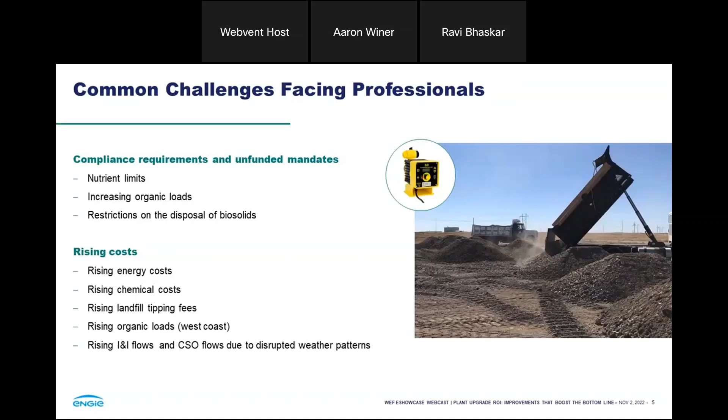We talked about rising landfill tipping fees, rising organic loads, and of course, in many areas, disrupted weather patterns and increased storm events lead to rising inflow and infiltration and combined sewer overflow flows. So these are all challenges. Most plants were not set up or equipped to handle them. Again, that's only on the influent side.

Inside of the plant itself, we have aging infrastructure. A lot of times equipment is set up to run to fail. So there's maintenance and repair that's deferred due to stretched capital budgets. And then you have upgrade challenges. Nearly every wastewater plant in North America was built at a time when energy was cheap and controls were expensive. And as we all know, the situation right now is exactly the opposite.

The other challenge is when plants are faced with the decision to upgrade a piece of equipment, they'll upgrade a bar screen or an influent pump, basically ad hoc or piecemeal upgrades without considering the whole plant, the effect on downstream process units. And then, of course, most wastewater plants in North America are publicly owned. They are subject to public procurement requirements, and that means that you have to do everything in the design, bid, build process.

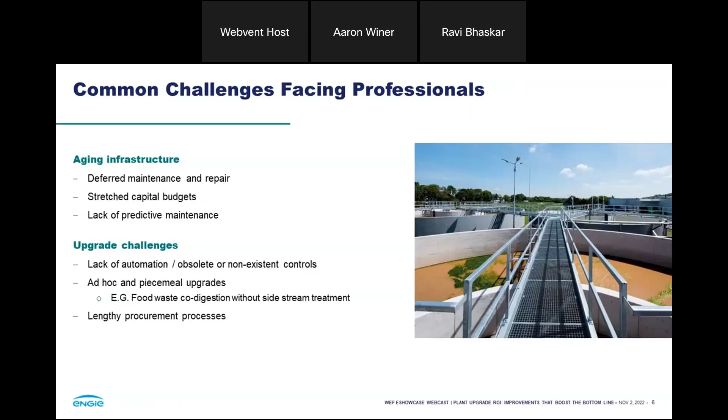And by the time the process is done, the design itself is often obsolete because the regulations have changed and the compliance criteria have changed. So this leads to a situation where they further put off doing upgrades, and then that makes the situation even worse. And then, of course, there's the total cost of ownership.

So what we at ENGIE like to do is to look at comprehensive, holistic views of the facility that consider long-term benefits, evaluate potential changes in the flow and load, whether you have pre-treatment programs, whether you have adequate planning for growth, whether you've considered population shifts and increase in usage as a result of the pandemic, especially when it comes to more people staying at home, a shift of occupancy to the suburbs away from downtown areas and office spaces. All of these have significant changes in the inflows and loads to the wastewater treatment facilities.

And then, of course, one should consider all grants and incentives. Many of us are wastewater professionals. We're preoccupied with the daily challenge of meeting our compliance limits.

We don't know, for example, that the recently passed Inflation Reduction Act has incentives to produce biogas, or you can get up to 30% of the cost of a project with an investment tax credit. These are things that we're not aware of. We at ENGIE have a group that deals specifically with grant and incentive funding, and they mine the various government publications for opportunities to help our clients fund these projects.

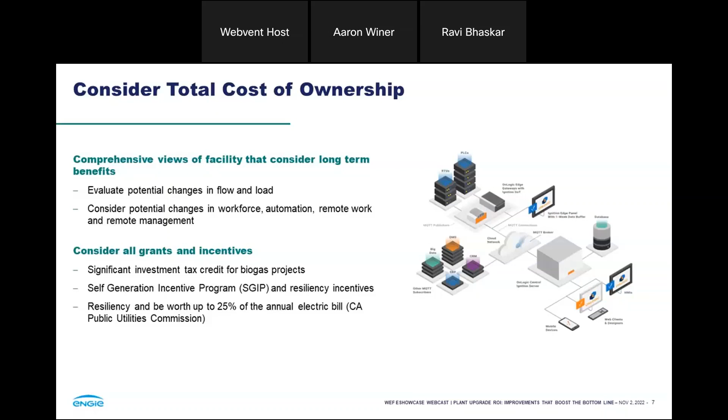And then, of course, there's alternate revenue sources from operations of a wastewater plant. The biggest right now is the Federal Renewable Identification Number and the California Low Carbon Fuel Standard, LCFS credits. You can convert biogas to RNG, which is renewable natural gas, basically by removing the hydrogen sulfide and the carbon dioxide, converting it to pipeline quality gas, and injecting it into the pipeline. For plants that are large enough, you can have a $30 million project pay for itself in as low as 7 years.

If you co-digest your sludge with high-strength food waste, you can often increase the production of gas by more than you would if you were to digest each stream separately. In many cases, you get revenue from tipping fees. And finally, if your biosolids are adequately stabilized and meet the federal criterion for Class A biosolids, then you can often have a revenue stream for biosolids repackaged as fertilizer.

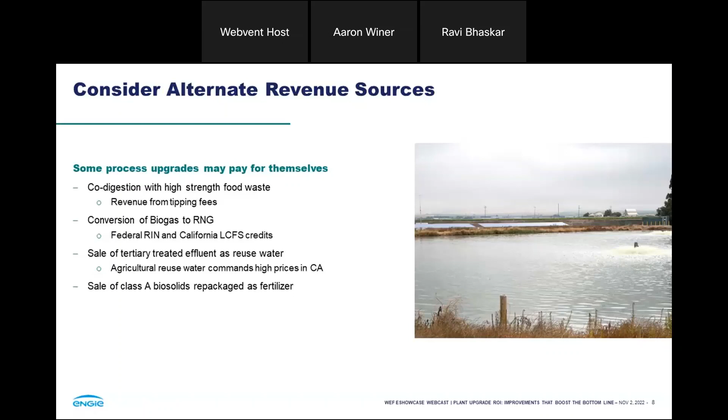In California, water is scarce, especially in the Central Valley. Tertiary treated effluent is often sold as reused water, sometimes getting as much as $200 an acre foot. An acre foot is 326,000 gallons. So there are revenue streams that are available even for small and medium-sized plants, but in many cases, the operators don't have adequate expertise or time to learn how to benefit from these opportunities and how to implement the projects that are needed to benefit from them.

So I'm going to talk now about process-based infrastructure upgrades. And by that, what I mean is approaches for entire unit operations. So, for example, you can look at a thickening operation. It's not just a matter of replacing a thickener. It's a matter of looking at what percent solids you're getting and what's the benefit from more thickening. Well, you get more solids residence time in the digester, which means that you produce more biogas, as an example. And the same is true for digestion, co-digestion, and of course, there may be unintended consequences.

A lot of times people look at food waste without paying adequate attention to the impact of a side stream. For example, you can have a high protein food waste stream that produces a lot of ammonia, which then impacts your aeration system. So it's essential to consider the entire unit operation or the entire plant when doing this kind of project.

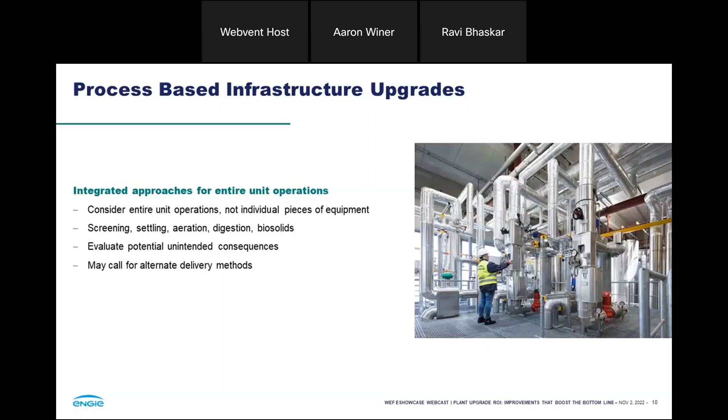And it may call for alternate delivery methods. And the reason for that is if you just go with the traditional design, bid, build approach, the company that's doing the design for one unit operation may not have adequate expertise to look at other unit operations and look at the plant as a whole. So this is where the agency benefits from an integrated approach.

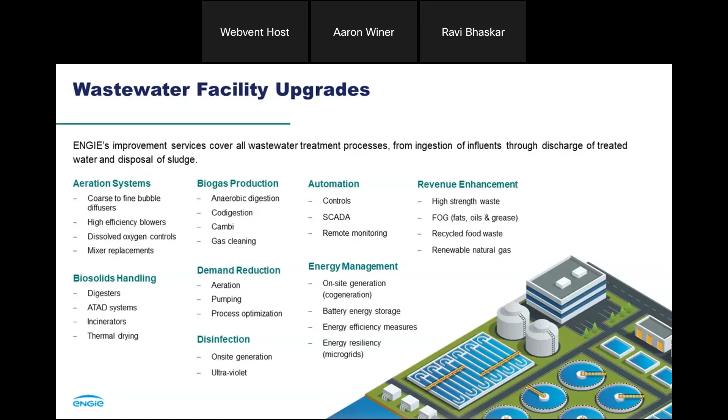We look at onsite generation, battery storage, and microgrid resiliency measures. So we offer comprehensive wastewater facility upgrades based on the unit operations that you have and the overall objectives that make sense for your agency and in your particular environment.

A lot of times people say, well, what's the payback for doing something like this? And it's really not about payback. It's about where are you right now and where do you want to be in 20 years and what's the best way to get from here to there.

As an example, right now we look at your baseline costs, your electric bills, your rate structure. Are you charging enough? Are you charging enough for your industrial users? Some places charge only 7 cents per pound of BOD. Other places charge 37 cents per pound. How does your rate structure fit in with your actual cost of treatment? What are your annual O&M costs? What are you doing for your biosolids disposal?

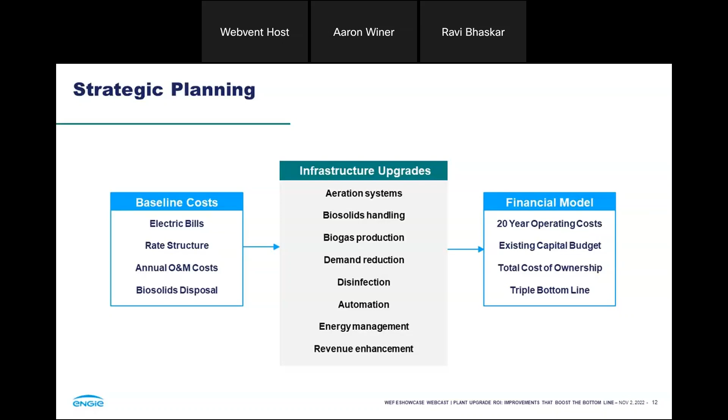So ENGIE has a comprehensive approach. This is not a quick sale to a public agency. We spend time in the planning phase. We look at the infrastructure, your existing inventory. We look at technology options. We look at the financial picture. And of course, we make sure your stakeholders are engaged. The last thing we want to do is to create a perception that may affect your public relations later on.

Then we go into the implementation phase, where we design, we build, we look at incentives. We look at your procurement, and there's regulations that allow agencies to use ENGIE as a source, but of course we have to go out to public bid for all of our contractors. We look at installation, and then finally we have the O&M portion of it, if you are willing to have us help you operate and maintain your facilities as well. Of course, we also have a community engagement where we offer scholarships and incentives to train students to enter the wastewater industry and to the benefit of the various agencies involved.

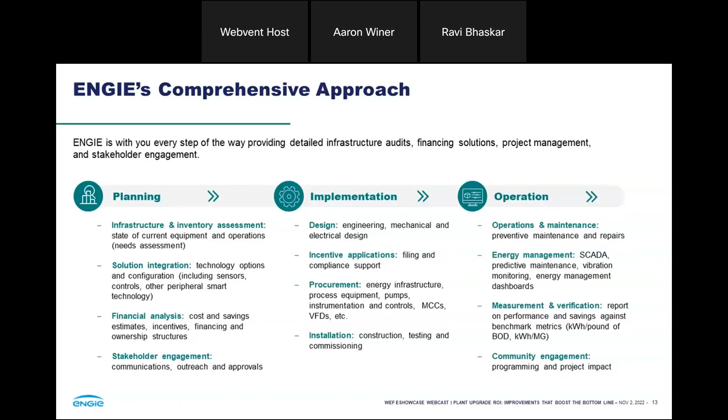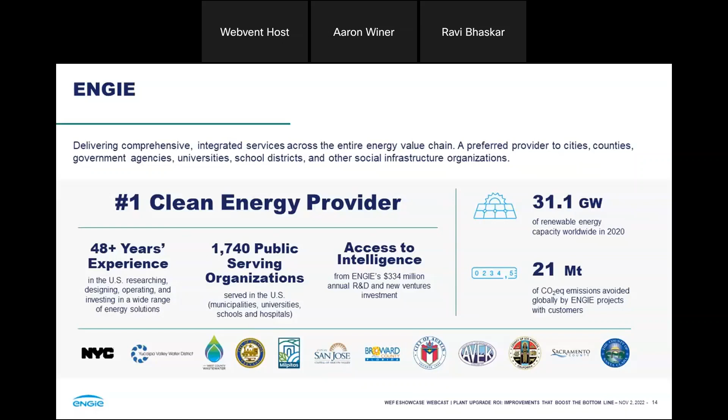So a little more about ENGIE. We're the #1 provider of clean energy in the world. And we have 170,000 employees. We have 48 years of experience in the United States, 175 years in Europe and across the world. Basically, we were formed by a merger between Gaz de France and Suez. And Suez, as you might be aware, built the Suez Canal. So we have over 30 gigawatts of renewable energy capacity worldwide in 2020, and 21 million metric tons of CO2 removed from the atmosphere as a direct consequence of our activities.

To reiterate, why should you partner with ENGIE? For all of the reasons that I outlined earlier, which is in-depth assessments, a turnkey solution, a single point of accountability. Especially when you have multiple contractors, multiple consulting firms and engineering firms working in your plant, tripping over each other and pointing fingers, it's easier to have a single source of accountability, a single source of project management, achieve energy and operational savings, and of course, performance guarantees.

In many areas, we guarantee that we will save you money, or we will write you a check for the difference between what we said we would save and what you actually save. And new revenue streams that I talked about earlier, from the production and generation of biogas, from additional revenue streams for renewable natural gas and biosolids and tipping fees and so on.

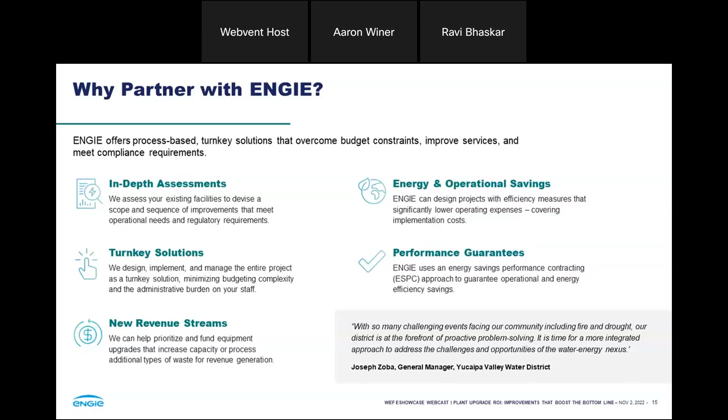So an example, a concrete example, is West County Wastewater. We saved them $83 million in the net program life over 20 years. We will be once we get to that point. We have renewable energy, 1.1 megawatts. We're putting in a 450 kilowatt cogeneration system powered by biogas. We will be generating Class A biosolids for agricultural uses,

4.2 million kilowatt hours of energy use reduction per year, and a 93% reduction in greenhouse gas over the life of the program. Most of that, of course, coming from they're not using their sludge drying beds that they had earlier and switching to alternative and environmentally friendly biosolids disposal practices.

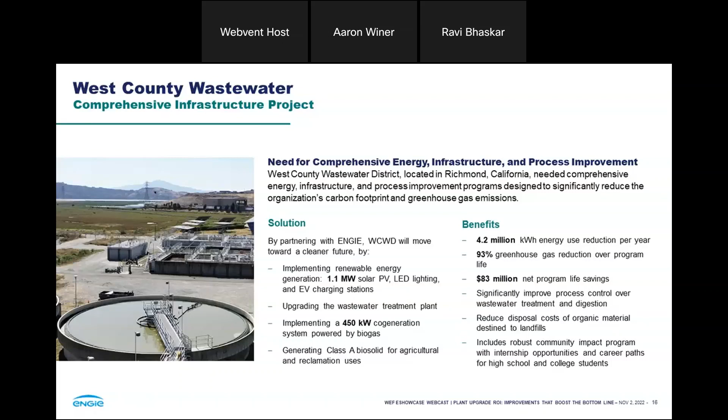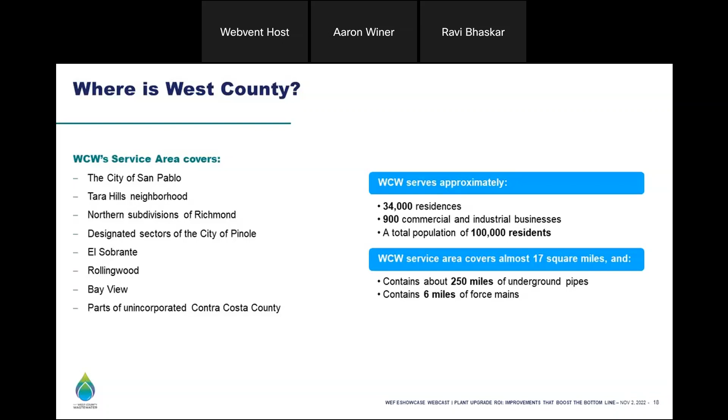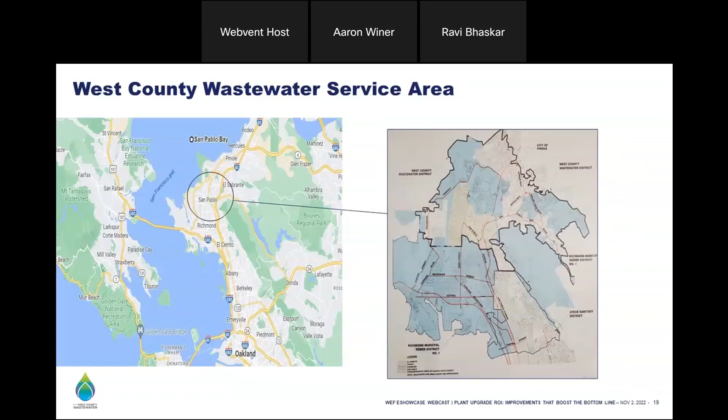So the work that we do, we celebrated our 100-year anniversary last December. So obviously we've been doing this for 100 years. The water quality and resource recovery plant, we actually are a conventional activated sludge treatment plant. We do, however, have an advanced component to our activated sludge where we're producing very high quality water with suspended solids typically less than 5 milligrams per liter, and turbidities down in the 1 to 2 or even less NTU range. And ammonia is less than 0.1 milligrams per liter in our effluent typically.

For more than 20 years, we've had various agreements with East Bay Municipal Utility District. They are a very large wastewater and water provider in the East Bay area, Oakland and the surrounding areas. So basically what we do is we provide our secondary effluent fully treated to them. East Bay MUD has 2 treatment facilities. They use our effluent, they reclaim it, polish it, and they send it to a local refinery. And basically what that does is it replaces what would need to be potable water used for these industrial uses.

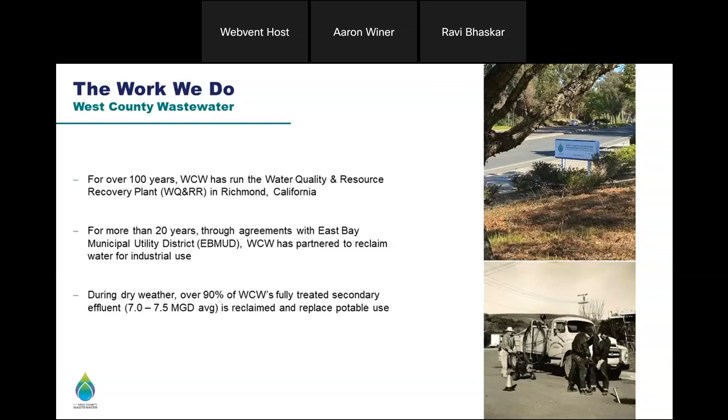So a little bit more about what we do. Mentioned the water quality and resource recovery plant, 17 sewer lift stations, and also you can see in the middle there, we contract, operate, and maintain two additional sewer lift stations and 1 storm pump station. And that work is done for Contra Costa County and also for the city of Richmond, which is a neighbor of ours. We're actually in the outskirts of the city of Richmond.

We also operate a certified environmental lab and manage and implement a state-approved industrial pretreatment and pollution prevention program. And those are our environmental services folks.

So, challenges and motivation for this improvement initiative. There have been changes to the regulations. They're always changing, as most folks in this industry know. The California Senate Bill 1383 mandates the reduction of organic waste to landfills. You can see there it's a 75% reduction, actually just about 3 years from now.

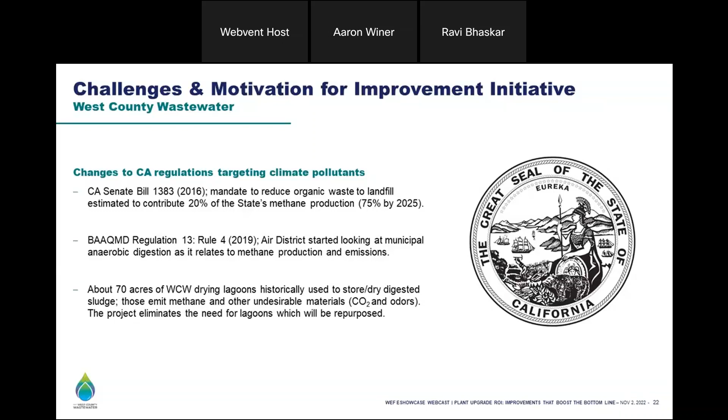And then you can see here additional challenges and motivation: offset increasing utility and electrical prices. For folks who don't live in California and aren't familiar, I'm sure you've heard about the wildfires that we unfortunately have typically this time of year. Our utility provider, Pacific Gas and Electric, has implemented public safety power shutdowns, where they discontinue electric service to certain areas on a rotating basis when it's very windy and there are other conditions that contribute to high wildfire risks.

So one of the things this project is going to do for us is improve our generation of clean electricity, and we will not be as impacted in the future by those public safety power shutdowns.

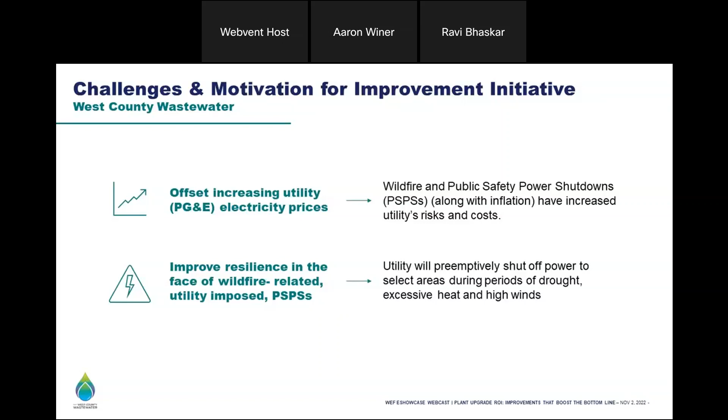The next slide, we're going to change gears a little bit to the near past and future of West County Wastewater, with some pictures coming up here. You can see on the right are two old digesters and an old gas storage tank on the lower right there, which have since been removed from service. Actually, they've been demolished, as you'll see in a minute.

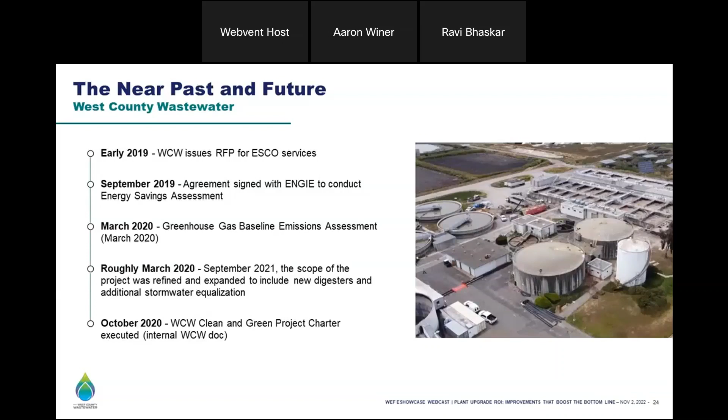In early 2019, West County Wastewater issued an RFP for the ESCO services, and that's when we started talking to ENGIE. Coincidentally, that was about the time I started for West County Wastewater, so my 3 years here have coincided with the evolution of this project. You can see the rest of the timelines. I'm not going to go through all of those, but it's worth noting that we broke ground this past spring, as the next slide will show. And these are more of the timeline for this work.

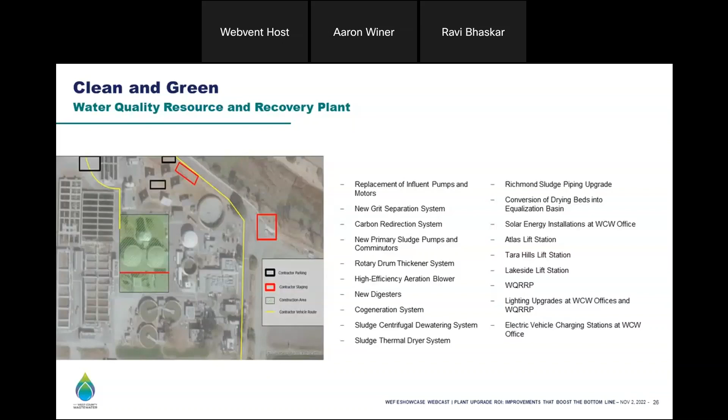This shows you another aerial view of our treatment facility. On the right are all of the additions and upgrades that we're doing as part of what we're calling our Clean and Green project. And as promised, here is the picture of the digester area that has been excavated and is being compacted for foundation and pilings for new digesters and the rest of the solids handling equipment coming as part of this project.

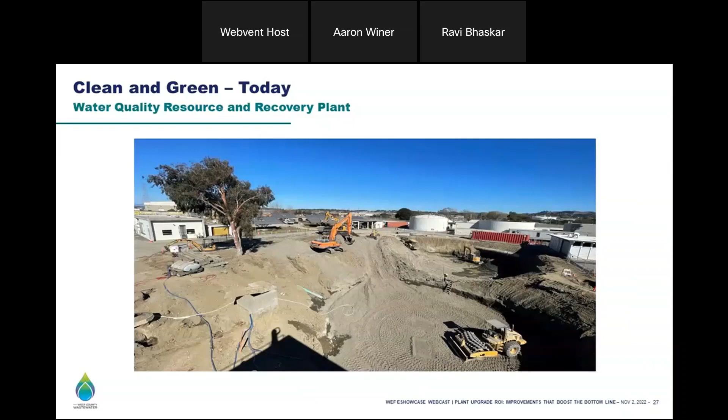I did want to mention one other piece of this project that I don't think was captured anywhere in this slide. One of the things that we're doing is chemically enhanced primary treatment, also called carbon redirection. We're installing polymer and I believe ferric chloride, which we're going to feed into our primary clarifiers to direct more BOD,

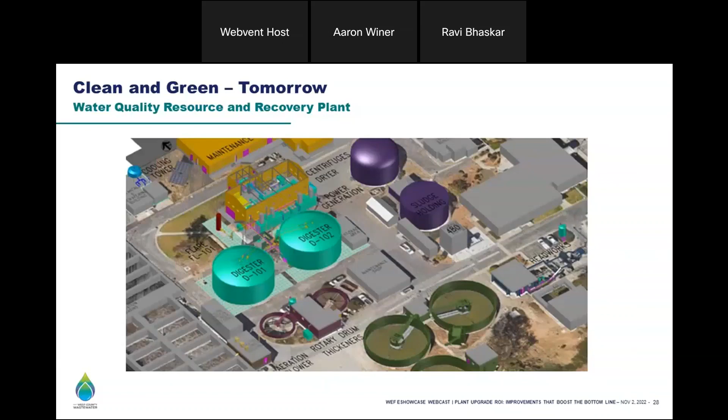biochemical oxygen demand, away from the secondary treatment system into the digesters, which will also enhance gas production in the digesters. It'll also, just by the mechanics, reduce the load to the secondary system and reduce the aeration requirements, which will also save electricity.

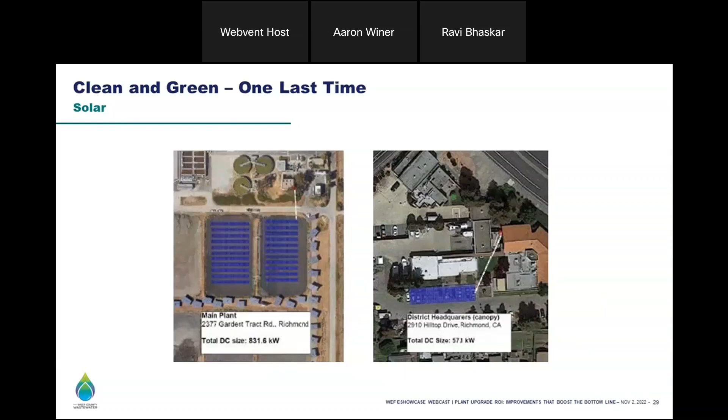And then just a couple of overview aerial shots. The one on the left is 831 kilowatts of solar that we're installing as part of this project, which will help power the treatment facilities. And then on the right, you can see that our headquarters offices, which is about 5 miles from the treatment plant, is also getting its own solar system, if you will. And we're also installing solar generating facilities at 3 of our largest lift stations.

And I did mention in an earlier slide that our greenhouse gas and carbon footprint impacts will be reduced by an estimated greater than 90% from what it is today. And that information is based on a greenhouse gas baseline study that we did, and also on the projected savings from this project.